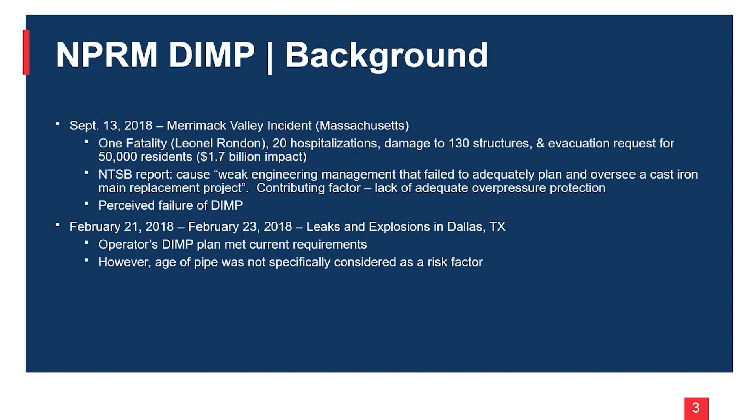So those are kind of the incidents that drove this rulemaking, and the regulatory history of how we got to this point as well. Just some background for you guys. It started in 2009 when PHMSA issued their Pipeline Safety Integrity Management Program for gas distribution pipelines, which is a mouthful, but effectively created all of the DIMP requirements in Part 192, Subpart P. So that was kind of a landmark change there, specifically putting DIMP programs in place, all the evaluation and record keeping that goes along with that.

Two years later, in 2011, the U.S. Secretary of Transportation Office announced a pipeline safety action plan, which basically allowed them to put some things in place for federal and state cooperation for accelerated repair and replacement of old pipeline infrastructure. So think your cast iron, your bare steel replacement programs. Many utilities around this time were able to work with their commissions to establish rate recovery procedures specific to main replacement programs. And that announcement is really what drove that process.

So fast forward again, 2018, those incidents occurred. And then in 2020, the Leonel Rondon Pipeline Safety Act is enacted as part of the PIPES Act of 2020. That was really the legislation that set the stage for this notice of proposed rulemaking, that additional requirements were going to be coming into place to prevent an incident like that from happening again. And then in 2021, kind of peripherally related, the bipartisan infrastructure law, which most folks have heard about, established PHMSA's first ever grant program, the Distribution Infrastructure Safety and Modernization Program that many municipal gas utilities are participating in, to provide funding to accelerate replacement of infrastructure as well.

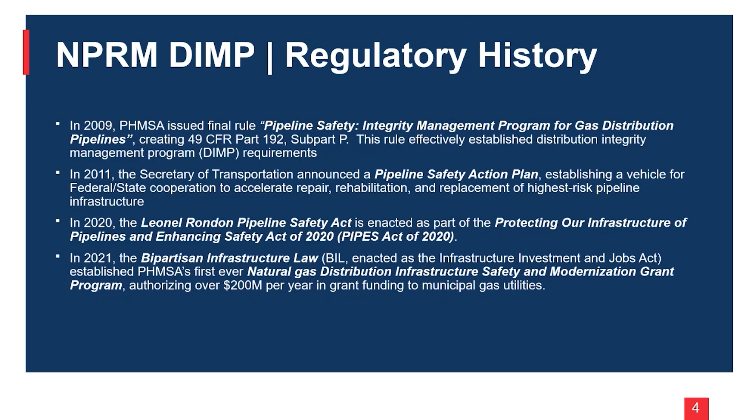So a common theme you're going to see within this rule is that there's definitely a focus on improving safety and improving procedures to prevent an incident like Merrimack Valley from happening again. But at the same time, PHMSA does not want to slow down replacement of problematic infrastructure. So putting additional measures in place without adding significant barriers to keep the work going. And there's a little bit of a challenge there sometimes preserving both of those objectives.

So just to look at the overview of the changes, we'll start going through these at a high level and then in a little bit more detail for each one. DIMP is certainly a big piece of this, so enhancements to that, really clarifying what some of those expectations are. Some of the things that may have been left a little more loosely to the operators to define are now being nailed down more clearly and concisely. Certainly one of those is consideration of age as a risk factor, harkening back to that Dallas incident, and then specific consideration of overpressurization as a threat. So that's your Merrimack Valley incident there, as well as consideration of abnormal operating conditions and low probability events. So not just dismissing something that might be a low probability, but could have a very high impact.

Also emergency response plan updates. So making sure there's timely coordination with emergency responders, the public, customers, and potential consideration of an incident command system. Operation and maintenance manual updates. So you'll see in this rule a lot of procedure updates, making sure utilities have in writing what they're going to do to respond to overpressurization and other threats. Also implementing management of change, or MOC, procedures.

Continuing with the overview, integration of traceable, verifiable, and complete records that are critical to maintaining proper pressure controls. We'll talk more about that. Inspection and monitoring requirements, so monitoring of pressure at stations during construction, some clarification of inspection requirements, and then another big one, upgrades to district regulator stations to prevent overpressurization. So some new requirements coming into place here with two separate types of overpressure protection, or if that's not feasible, putting in place and defining alternative preventative and mitigative measures and what those might look like. There are a few smaller updates as part of this as well, some clarification of test record requirements and things of that nature that PHMSA has incorporated into this rulemaking. So that is kind of the overview.

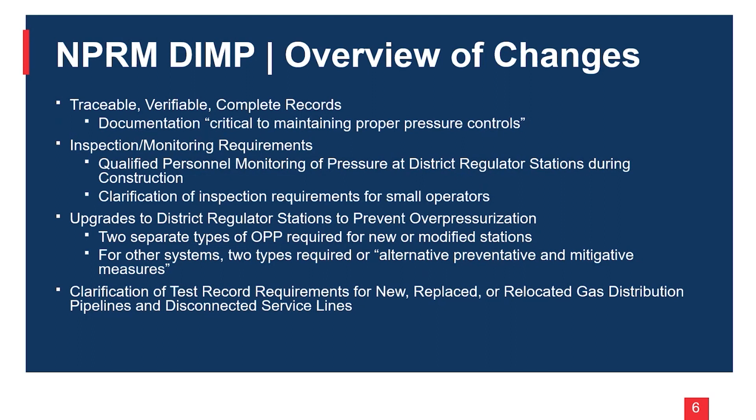As we dive in a little bit more to each of these topics, we'll start with DIMP, right? DIMP enhancements, and that's 192.1007(b), starting with identification of threats. So this is kind of the first step in your DIMP process, identifying potential threats to your system.

And what PHMSA is really looking for you to do here is look at specific material types with known issues, explicitly identifying overpressurization as a threat to low pressure systems, including extreme weather and geohazards as subcategories within natural forces, and also adding an explicit requirement to consider the age of the system, piping, and components in identifying threats.

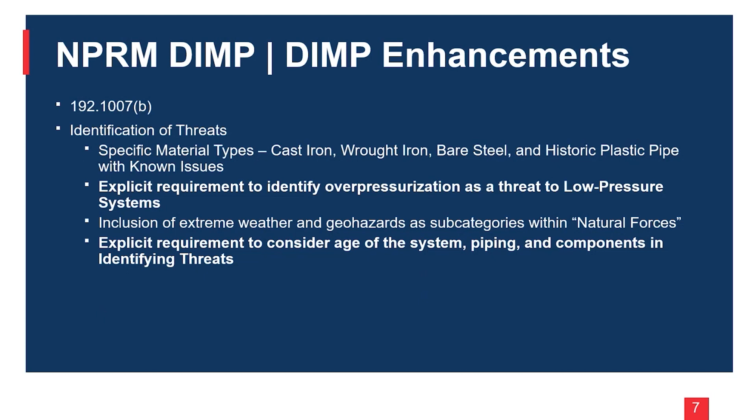So the key ones there, the overpressurization and the age of the system, operators may have considered those on their own volition previously, but PHMSA is now saying these are things that you must specifically consider when you're identifying threats. From there, going into the next step, evaluating and ranking risks. So that's 192.1007(c). Evaluating risks that result from pipelines constructed with certain materials. Those are potentially more risk-prone materials.

Evaluation of risks from an overpressure event, specifically that could result in gas burning equipment seeing higher pressures than they might expect. And then some other ones here, consideration of risks even if the operator has yet to experience that risk on your system. It's no longer acceptable to say that we've never seen that happen. We don't anticipate that happening.

PHMSA is really looking for operators to say that, even these low probability events, you cannot say that those would have no potential consequences unless you're able to provide a very detailed engineering analysis to PHMSA stating why you don't see those low probability events as an issue. So really putting the onus on the utility to justify why something may not be considered as part of your DIMP plan. Again, a lot of documentation type requirements included in this rule as well.

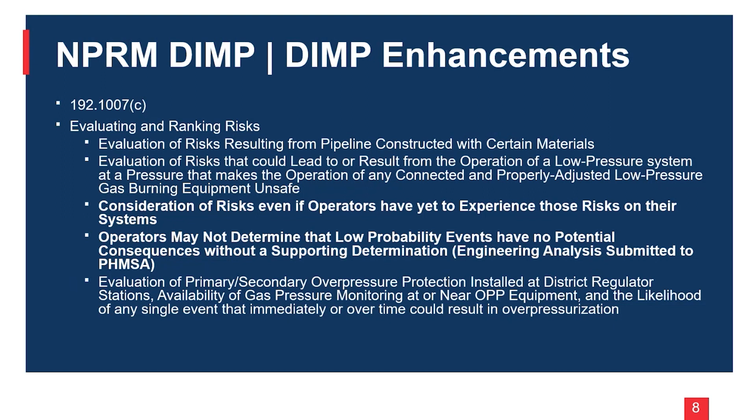As we move on to the next phase here, so you've identified your risks, you've ranked and evaluated your risks, then you're looking to identify and implement measures to address those risks. That's 192.1007(d). So this is where some of that traceable, verifiable, and complete record requirement comes in. So looking at those for the pressure controls on your system, and then confirming, as we'll talk about here in a little bit, that each of your district regulator stations meets the new design standards for additional overpressure protection, or if you're not able to do that for some reason, that you've specifically identified what preventative and mitigative measures you're going to take to meet that need instead, and that will require a specific notification to PHMSA.

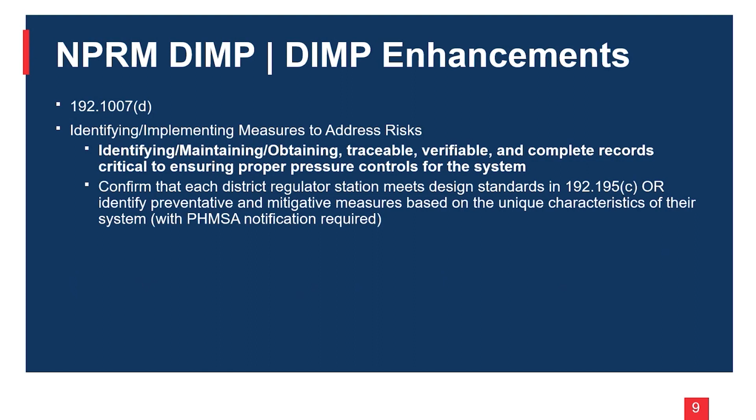That's kind of a summary there of the new DIMP requirements as we move into emergency response, and that's 192.615. There were a lot of challenges. I encourage you to read through that NTSB report again for Merrimack Valley, not only the incident itself occurring, but how communication was made with first responders, the general public, customers, or maybe more accurately, the lack thereof of communication.

There's a significant amount of time that passed from the incident first occurring to when more coordination and communication occurred, and ultimately probably resulted in a lot more folks being put under an evacuation order. Remember, there were about 30,000 people under that evacuation, more than probably needed to be if communication had occurred a little bit more efficiently and promptly. So that's really what PHMSA is after here, some of these notifications.

Operators may be familiar with the valve rule that was previously published that requires them to notify what they call public safety answering points, or PSAPs, in the event of a gas pipeline emergency. But what this rule is looking to do is clarify what some of those emergencies may be. So notifying of potential ruptures, notifying of a release of gas that results in one or more fatalities, or, PHMSA likes to put this blanket language in there, any other emergency deemed significant by the operator. So putting some onus on the utility there to determine what that might be.

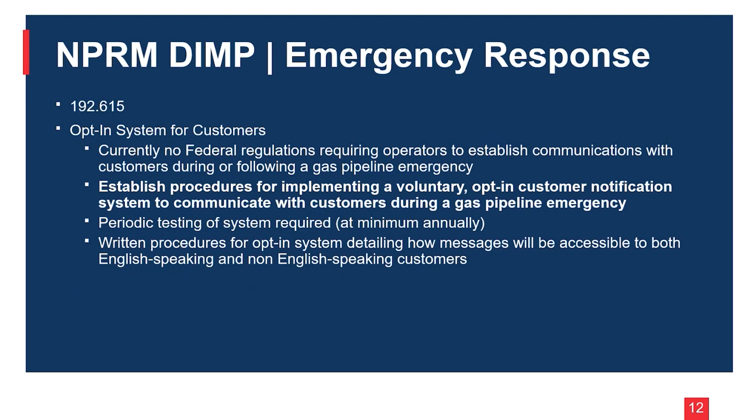The final piece of the emergency response is the potential for requirement of incident command systems, or ICS. This is not specifically required in the rulemaking as it stands today, but they are requesting comments on this. And an ICS is effectively a standard approach to command, control, and coordination for on-scene management of emergencies or other incidents. So again, thinking, written procedures, established protocols, clear chains of command.

An example of that is the National Incident Management System, or NIMS, that's used by a lot of federal agencies. So they're seeking comment from gas utilities on this right now. This may or may not be included in the final rule, but again, PHMSA's intent here was to address some of the issues from that Merrimack Valley incident where communication was a significant challenge and probably complicated matters to a pretty significant degree.

So from there, looking at O&M updates, again, a heavy focus on procedures and documentation as part of this rule, and this is 192.605. So updating your O&M manual to include specific provisions for overpressurization, both investigating, when these issues occur, documenting ahead of time what specific actions and events personnel must follow, and establishing clear statements of authority for relevant personnel so that everybody knows what they're responsible for, what they're able to do before one of these events happens.

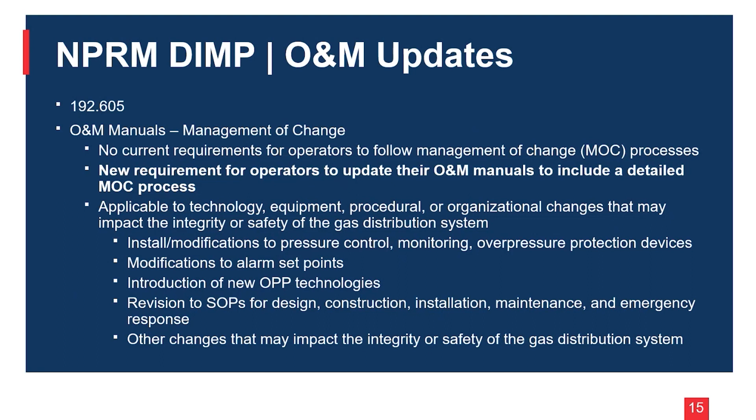As part of management of change as well, PHMSA is instituting some requirements that, quote unquote, qualified personnel must review and certify any construction plans associated with installations, modifications, replacements, or upgrades. And those qualified personnel should be qualified under subpart N of Part 192. PHMSA is saying that could include an engineer with a PE license, could include a subject matter expert per se, or any other employee who possesses the necessary knowledge.

The NTSB, as part of their recommendation for Merrimack Valley and other incidents, has called on states to require that all future gas infrastructure projects require licensed professional engineer approval and stamping. Of course, the NTSB investigates these incidents when they occur. They don't have the regulatory authority over utilities. That's what PHMSA is responsible for. So PHMSA has certainly taken that NTSB recommendation into account.

But also, again, kind of balancing, like I mentioned before, PHMSA knows that utilities have challenges with the availability of professional engineer resources, that could cause delays in the remediation of integrity issues. So if those resources aren't available to do the reviews, and the work in the field grinds to a halt as a result, that's maybe not in everybody's best interest either, because at the end of the day, we want to make sure these problematic items are getting replaced.

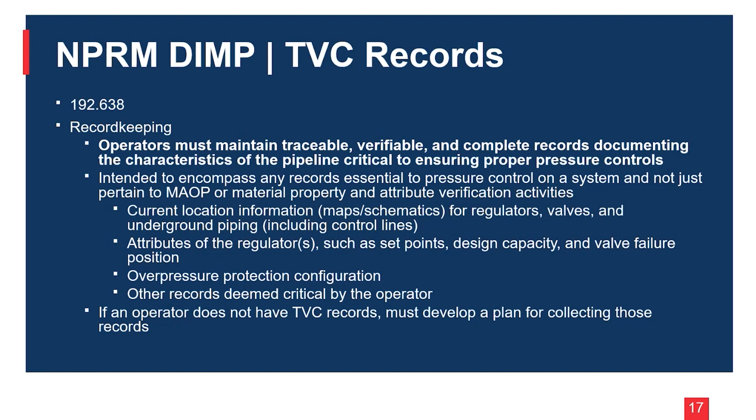They state, certainly, that if you don't have those TVC records, a plan must be developed to collect those records, which may sound easier than it is in reality. That an operator must also collect those records on an opportunistic basis. So there are provisions certainly in the code for that already, exposed piping reports, things of that nature, but integrating that into this process as well.

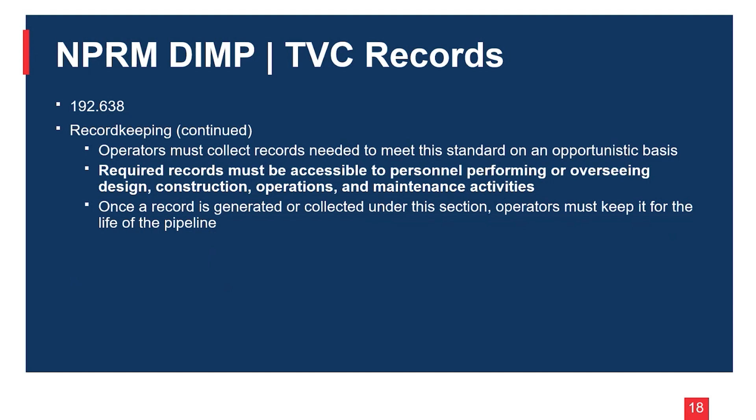And another key piece of this is that PHMSA is saying that those required records, you don't just have to collect them, you must keep them accessible and organized to where personnel that are performing or overseeing certain tasks can easily find them and utilize them, because those records are of no use to anybody if they're not accessible. So another thing that they're saying here is that once one of those records is collected, operators must keep it for the life of the pipeline. That's certainly something that's being discussed as part of the comments as well.

All right, so as we get into some of the inspection and monitoring requirements, this is 192.640 and 192.605. There are not any requirements right now for operators to have procedures for monitoring gas pressure with qualified personnel or having a remote capability to shut off the flow of gas. So you can imagine how this could have been relevant in the Merrimack Valley incident. If proper monitoring was taking place, noticing that pressure was exceeding where it should have been, having somebody there on site to quickly close emergency valves or have the opportunity to do an emergency shut off could definitely have prevented that event from occurring.

So as part of that, PHMSA is issuing a new requirement here for those qualified personnel to be on site, to monitor pressure, and have the capability to shut off the flow of gas during an overpressurization event. This does not apply if an operator already has the ability to remotely monitor pressure and remotely or automatically shut off the system. So if you have some kind of provision to do a shut off already, you do not necessarily have to have personnel on site. Again, those personnel must be qualified under subpart N, and of course, written procedures are required for implementing these monitoring requirements.

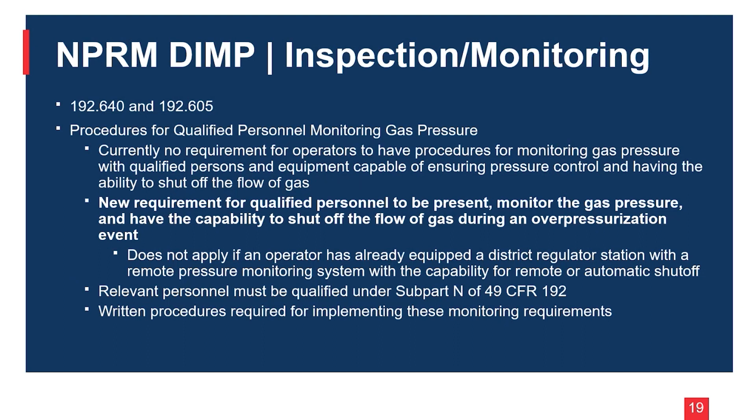A smaller inspection provision, something that's kind of been around for a while. There's concerns from small operators about existing requirements for personnel other than those who completed the construction task to conduct the inspection. So an exception has been added for gas distribution mains for small gas distribution operators as part of this rule that basically allows personnel who were involved in the same construction task to inspect each other's work when the operator could otherwise have only complied if they used a third-party inspector.

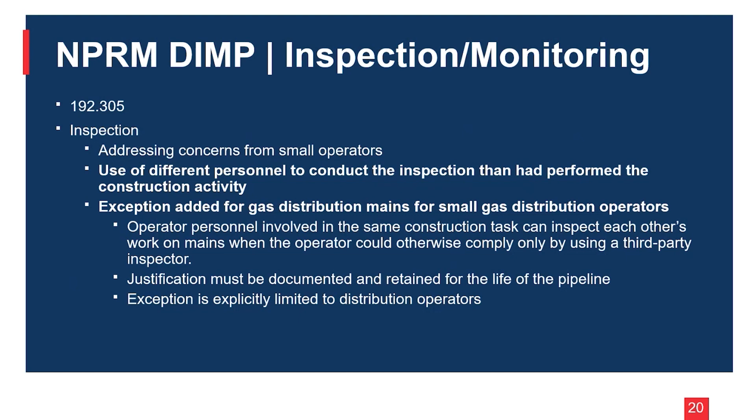So this is really intended for small operators that don't have a lot of internal staff, maybe don't have the financial resources to employ third-party inspection, but to do this, justification has to be documented and retained for the life of the pipeline. And certainly PHMSA would evaluate whether that justification is reasonable or not. So something for smaller operators to consider, and something that has been clarified or will be clarified as part of this rule.

Continuing, so test records, 192.517 and 192.725. Right now, there are a couple of categories of tests. So pipelines operating below 100 PSI, service lines, and plastic pipelines are only required to retain records for those tests for 5 years. PHMSA is proposing here that now those tests must be kept for the life of the pipeline. So it's a somewhat significant change there.

A more minor change for 192.725: for reinstatement of service lines, some clarifying language that those service lines must be tested in accordance with subpart J of this part. So just making it clear that those reinstated service lines have to be tested effectively to the same requirements that all other pipe components are tested to.

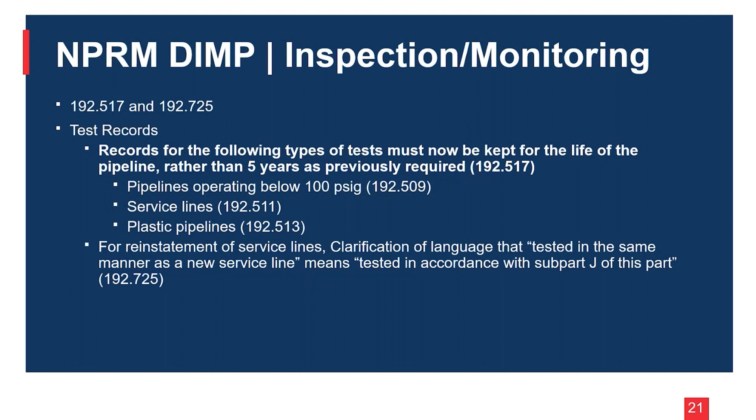Then we get to potentially the big one here with the station OPP and overpressure protection. So this is 192.195 and 192.741. And there are effectively 3 new requirements that are coming in for district regulator stations that serve a low pressure distribution system. I think that's some important language to pay attention to as far as how PHMSA defines a district regulator station as part of this rule, serving a low pressure system, to see how many stations would actually fall under this requirement.

But that first rule, the big one, is that those district stations must now consist of at least 2 different methods of overpressure protection. So that could be a relief valve, it could be a monitoring regulator, could be an automatic shutoff valve, but it is no longer sufficient in this case to just have a working regulator and a monitoring regulator of the same type.

Vis-a-vis the incident in Merrimack Valley, that was the configuration. There was a working regulator and a monitoring regulator. Both of those had downstream control lines. Both of those experienced the same issue and failed to operate properly. So in that case, the backup system really did not provide the level of protection that was intended as part of that design. So this requirement to have those 2 methods of overpressure protection will apply to any stations that are new, replaced, relocated, or otherwise changed.

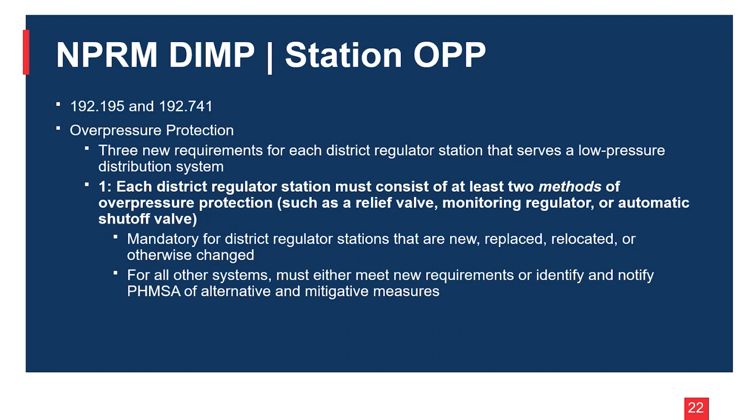And for all other systems, you either have to meet the new requirements, or if you're not touching these systems, identify and notify PHMSA of alternative and mitigative measures of specifically what you're going to do to avoid the need to replace those components.

The second requirement that's part of this rule is that each district regulator station serving a low pressure system must minimize the risk of overpressurization that could be caused by any single event that either immediately or over time affects the safe operation of more than one overpressure protection device.

So there's a few examples that PHMSA gives here. It could be hydrostatic testing upstream that results in moisture freezing concerns. Could be construction work upstream and metal shaving concerns. Could be oil, hydrates, or high sulfides entering the system. Could be that damage to control lines that we discussed. So, a few specific considerations there.

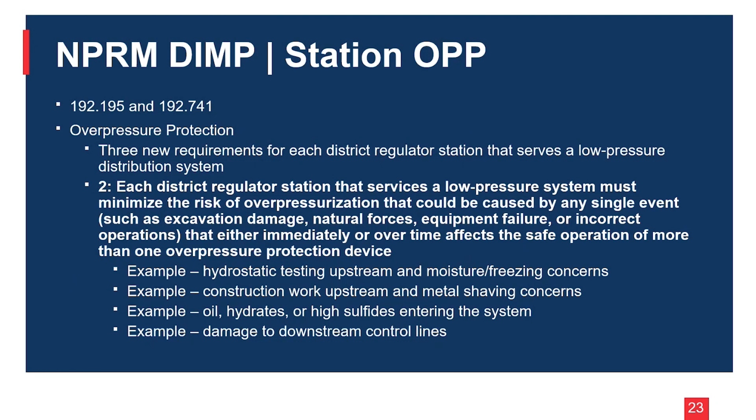And then the third new requirement is for remote monitoring of gas pressure required at or near the location of overpressure protection devices. So the current telemetering requirements do not require any active monitoring. So what they'd be looking to do here is making sure that you have an active monitoring system for pressure at your overpressure protection devices.

These 3 new requirements, along with most of the requirements in the rule, will require operators to be in compliance within 1 year of publication of the final rule, which could be a pretty quick time frame, specifically for these OPP devices.

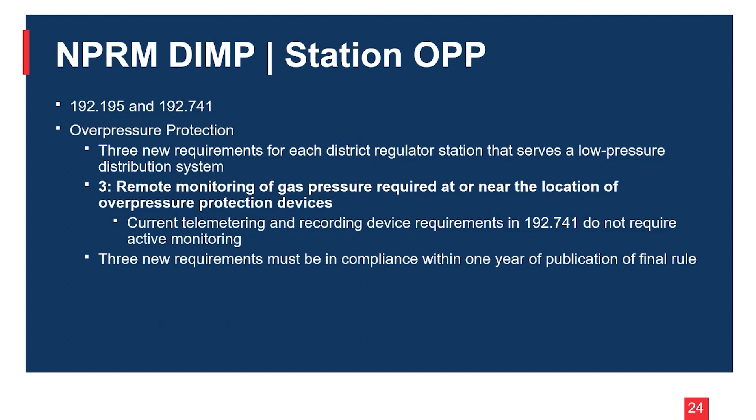So the question is, what happens now, right? So where do we go from here? That's kind of the summary of all the provisions, but what happens next? So this NPRM, obviously not an official rulemaking yet, was published in the Federal Register for everybody to review on September 7th of this year. AGA, APGA, and NGA have been working on joint industry comments. Those were submitted on November 6th, so a little bit ago. Those are currently being reviewed by PHMSA.

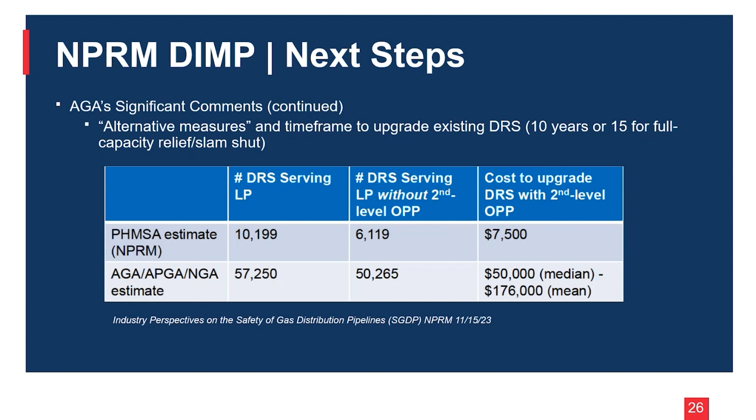But really appreciate everybody's time today. I hope that this was a good introduction, at least, to where we expect this rule to be going and kind of what the major provisions are.

Certainly interested in discussing this further with utility operators and how you guys see the big concerns of this, what you expect to be the most major impacts, changes or considerations that you're looking at as part of this. Certainly we want to be part of the solution, working with the industry as a whole here to remember that the end goal here is to always be increasing the safety of our gas pipeline distribution system, preventing incidents like Merrimack Valley from occurring, but also finding efficient and feasible ways of putting procedures like this in place. So certainly appreciate the opportunity to be part of that discussion here with everybody.